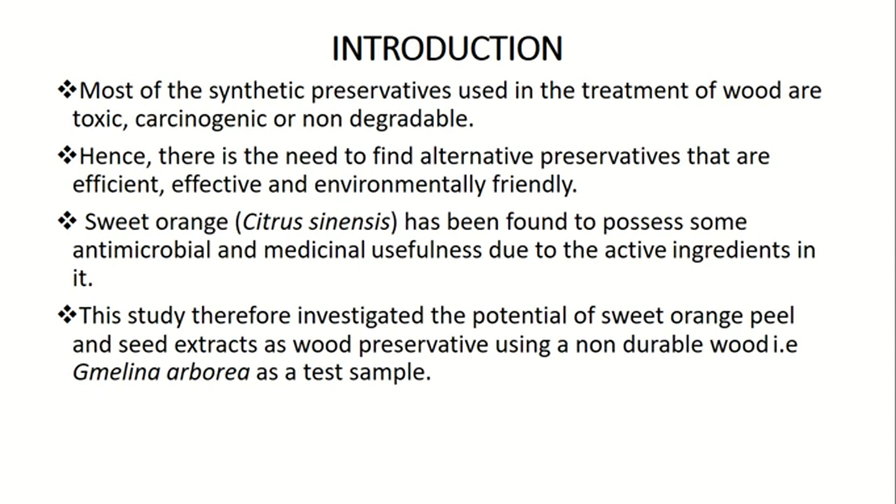The sweet orange was obtained from Ile-Ife, Ife East local government of Osun State. The tree is of height 5.3 meters and about 23 years of age. It was properly identified at the Department of Botany, University of Ibadan. The seeds per orange fruit range from 8 to 17. The seeds were properly shelled from the coats, air dried, and ground to increase the surface area.

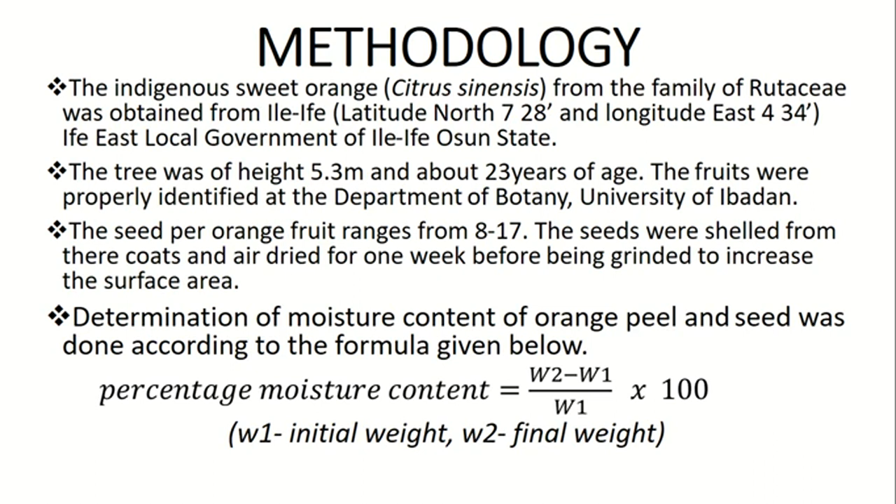The determination of moisture content was carried out according to this formula: percentage moisture content equals W2 minus W1 over W1 times 100. W1 was the initial weight and W2 the final weight.

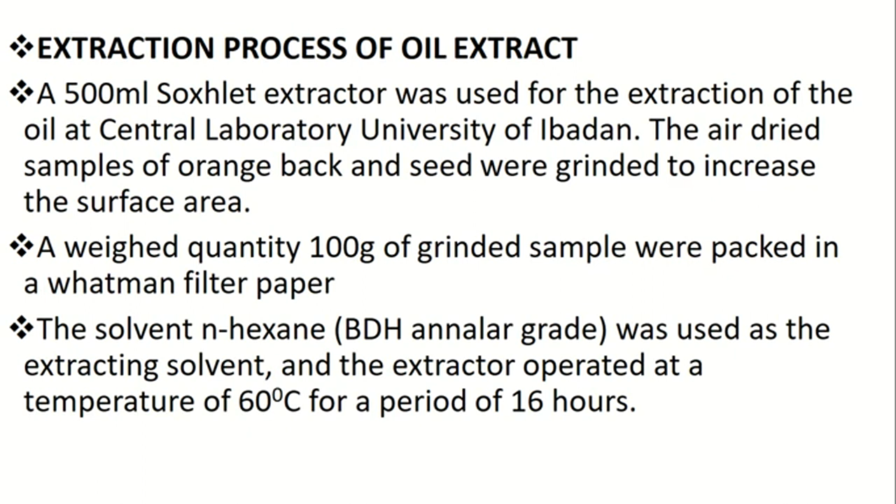Extraction process of oil extracts. A 500 ml Soxhlet extractor was used for the extraction of the oil at Central Laboratory, University of Ibadan. The dry samples of orange peel and seed were ground to increase the surface area. A weighed quantity, 100 grams of ground sample, was packed in a Whatman filter paper. The solvent n-hexane was used as the extracting solvent. The extractor operated at a temperature of 60 degrees centigrade for a period of 16 hours.

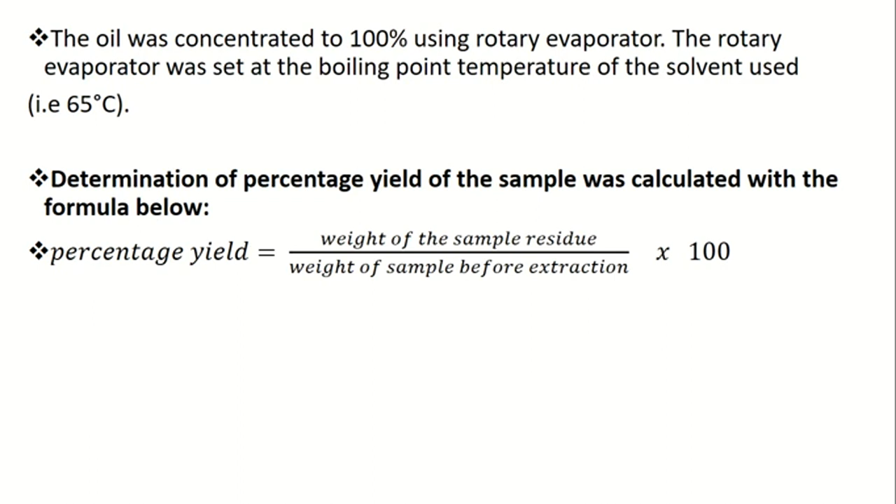The oil was concentrated at 100% using a rotary evaporator. The rotary evaporator operated at a temperature of 65 degrees centigrade. Percentage yield was determined by this formula: weight of the sample residue over weight of sample before extraction times 100.

Preparation of wood samples. The wood species used was Gmelina arborea, as said earlier on. The wood was bought at Songo Wood Plank Market, Ibadan, Oyo State, taken to Forestry Research Institute of Nigeria for proper identification at the Department of Forest Product Development and Utilization, and it was processed. The process involved cutting, planing, and also dimensioning. The wood samples were properly planed and cut to dimension 2 cm by 2 cm by 6 mm.

The determination of moisture content of Gmelina arborea was carried out as in the earlier mentioned procedure for Citrus sinensis. We weigh before and weigh again after oven drying, and we apply the formula initial minus final over final times 100/1.

Preparation of preservative concentration. The volume to volume method was used to dissolve the extract of both the seed and the peel in kerosene. 1 ml of extract in 99 ml of kerosene is equivalent to 1% dilution. Hence, 0%, 25, 50, 75, 100, as well as the control were used for the study.

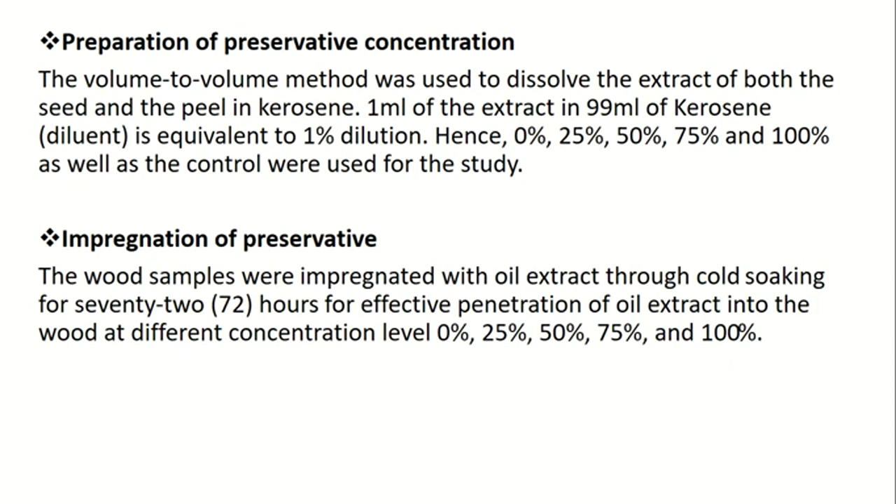Impregnation of preservative. The wood samples were impregnated with oil extracts through cold soaking for 72 hours for effective penetration of oil extract into the wood at different concentration levels: 0, 25, 50, 75, and 100%.

Absorption test. The rate of absorption of the wood samples when immersed in preservative was based on the difference between the weights before and after immersion. Preservative in percentage equals W3 minus W2 over W2 times 100. W3 means weight of wood sample after immersion in the preservative. W2 means oven dry weight of wood samples before immersion.

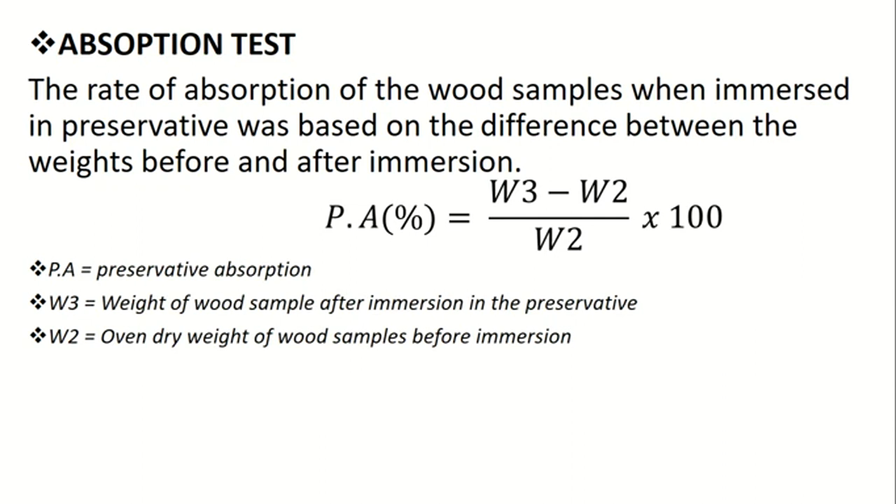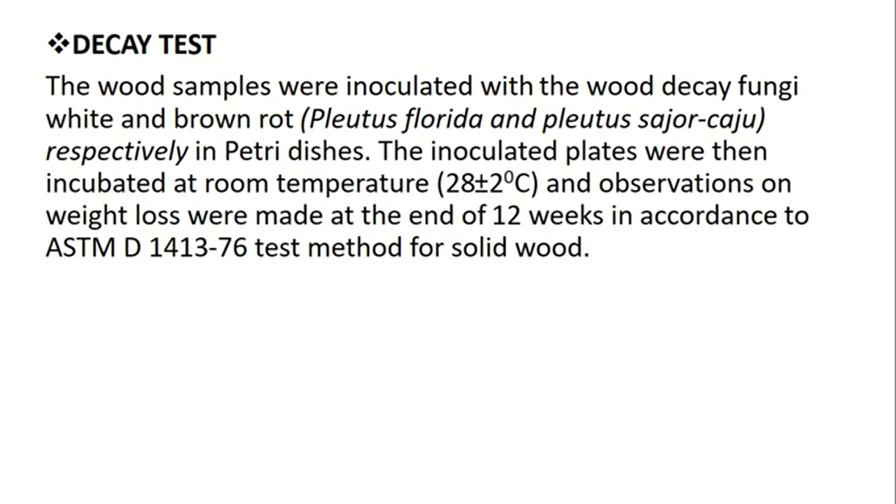Decay test. The wood samples were inoculated with the wood decay fungi, white and brown rots respectively, in petri dishes. The inoculated plates were then incubated at room temperature, and observations on weight loss were made at the end of 12 weeks in accordance with ASTM D1413-76 test method for solid wood.

At the end of incubation, blocks were removed from the test petri dish, and the mycelium was carefully brushed off the samples. The initial and final weights were taken to determine the weight loss. The weight losses were used to determine the effect of fungal inoculation on wood samples.

Wood decay was estimated using the formula initial weight minus final weight over initial weight times 100/1 as shown. Results and discussion. The initial moisture content of the Citrus sinensis peel and seed were found to be 60.7% and 57.6% respectively. The peel and the seed were dried below 10%.

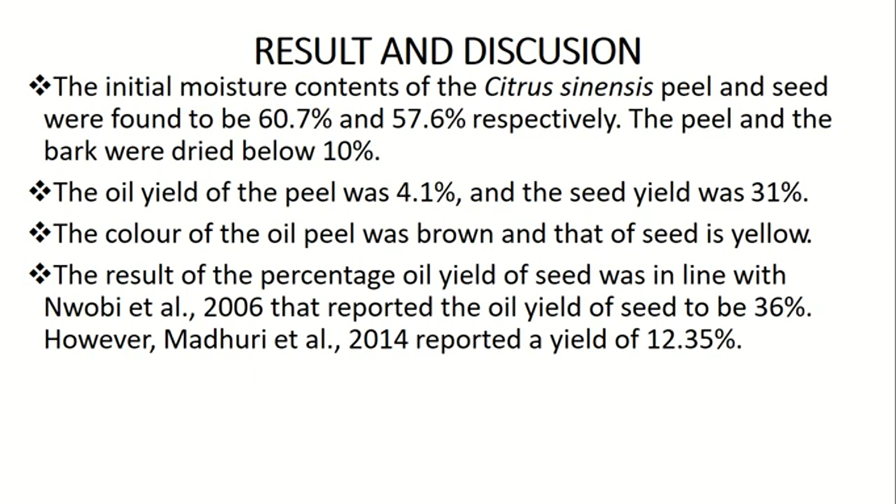The oil yield of the peel was 4.1% and the seed yield was 31%. The color of the peel oil was brown and the seed oil was yellow. The result of the percentage oil yield of seed was in line with Nwobi et al. 2006 that reported the oil yield of seed oil to be 36%. However, Madhuri et al. 2014 reported a yield of 12.3%.

The mean value of the absorption rate of preservative was found to be 14.98; the highest value of the absorption of the peel oil extract was 16.7, while the lowest value was 12.25. The mean absorption rate of wood samples in citrus seed oil extract as preservative was found to be 15.1, and citrus peel extract was found to be 14.87.

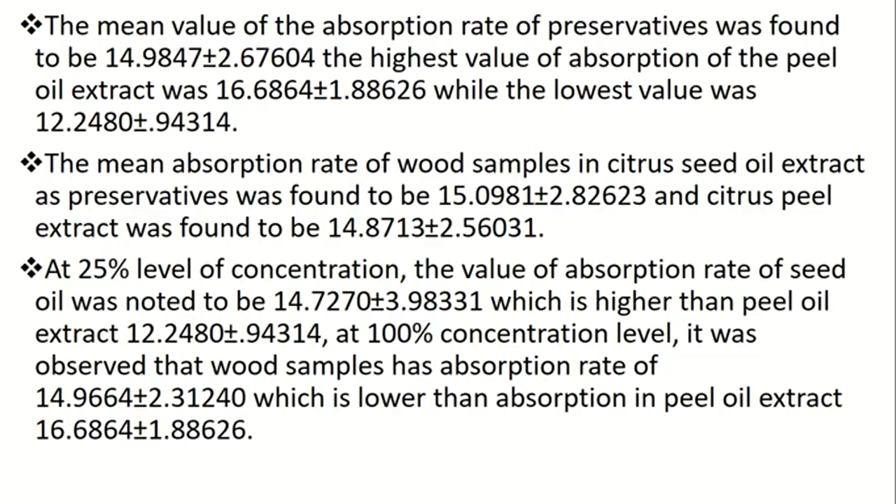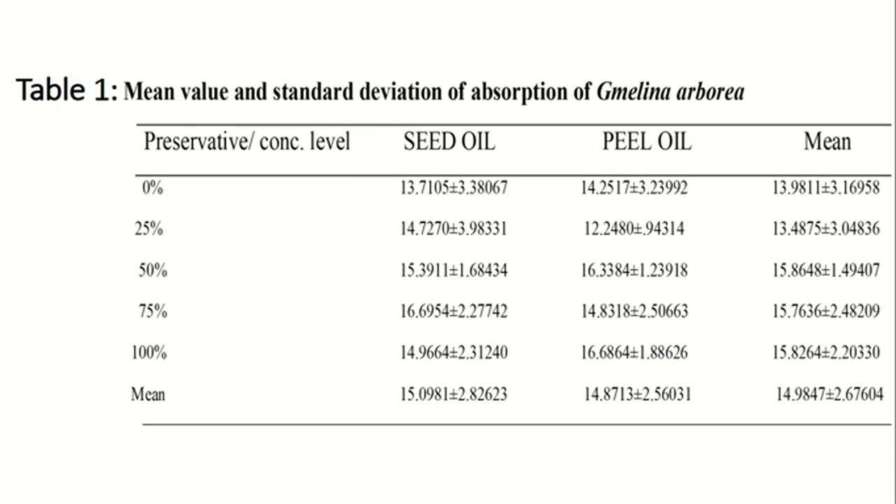At 25% level of concentration, the value of absorption rate of seed oil was noted to be 14.73, which is higher than the peel oil extract, 12.25 at 100% concentration level. It was observed that wood samples have an absorption rate of 14.97, which is lower than absorption in peel oil extract, 16.69. You can see it in table 1, mean value and standard deviation of absorption of Gmelina arborea: the preservative concentration, the seed oil, the peel, and the mean value.

It was observed that there was a higher weight loss at the control wood sample, untreated wood samples, compared to other concentration levels, which had a mean of 22.75, and lower weight loss, 11.75, at wood samples treated with 100% preservative for the seed oil.

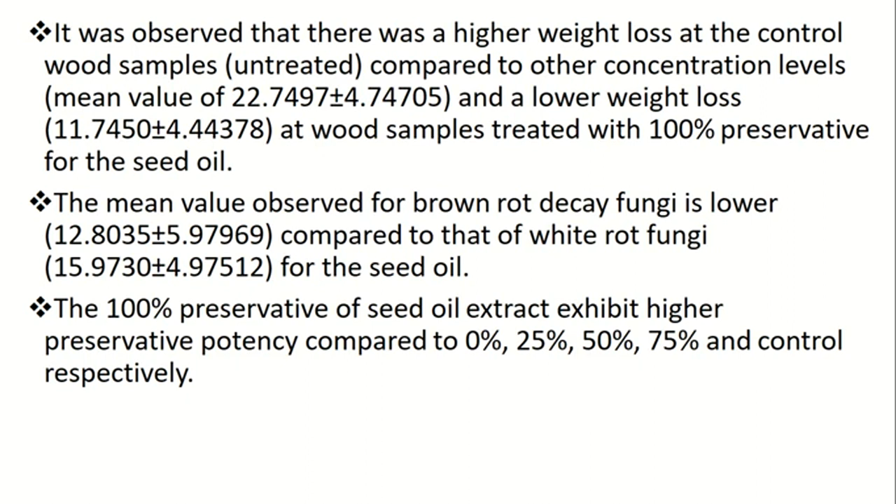The mean value observed for brown rot decay fungi is lower, 12.80, compared to that of white rot fungi, 15.97, for the seed oil. 100% preservative of seed oil extract exhibits higher preservative potency compared to 0, 25, 50, 75, and control respectively. Table 2 reflects weight loss variation in wood decay using Citrus sinensis seed oil extract as preservative. You can see the concentration of the preservative, the values for the white rot fungi, the values for the brown rot fungi, and the mean value.

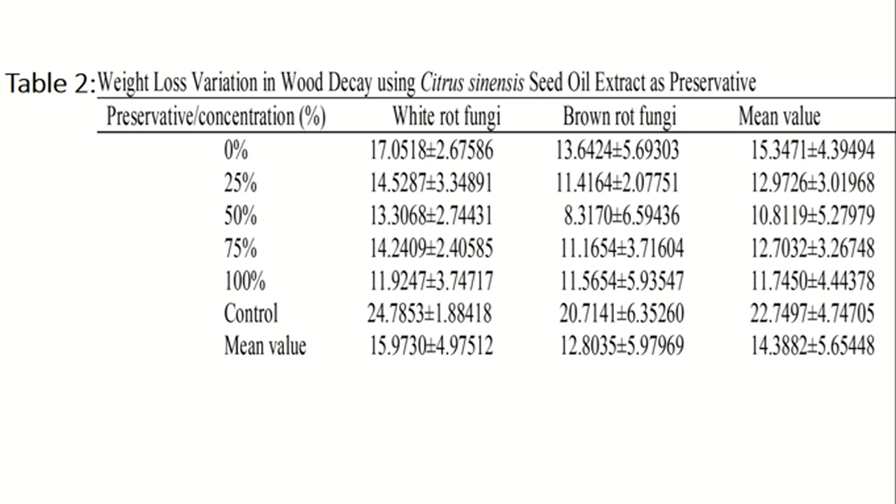For the peel oil extract, higher weight loss, 21.19, was observed at the control untreated compared to wood samples treated with preservative at different concentration levels. 100% preservative treatment is more effective than other preservative treatment levels as reflected on both fungi, white and brown rot, with mean values of 8.32 and 8.06 respectively. The attack of white rot fungi in respect to percentage weight loss was high compared to brown rot fungi.

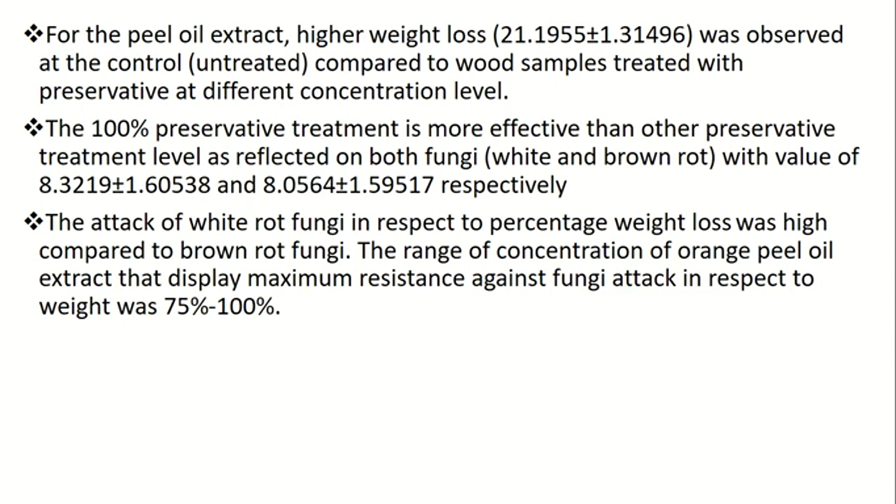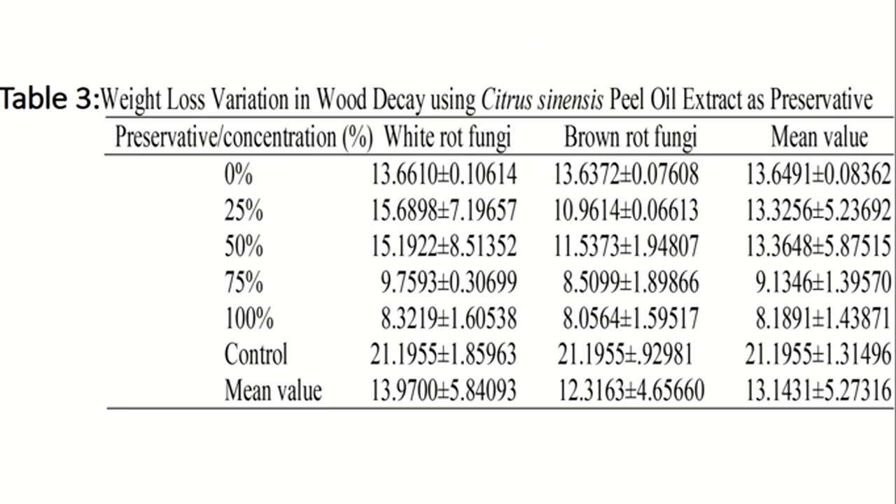The range of concentration of orange peel oil extract that displays maximum resistance against fungi attack in respect to weight was 75 to 100%. Table 3 shows weight loss variation in wood decay using Citrus sinensis peel oil extract as preservative. You can see the preservative concentration in percentage, the white rot fungi, the brown rot fungi values, and the mean value.

Conclusion: Citrus sinensis seed and peel oil extracts showed considerable effectiveness against white rot fungi and brown rot fungi attack on Gmelina arborea wood at varying concentration levels. The maximum range of effective concentration level was found to be between 75% to 100% of the orange seed and peel oil extract. However, the level of efficacy as observed from the study was considerably low, with a mean value of 8.19 compared to other plant extracts and synthetic chemicals.